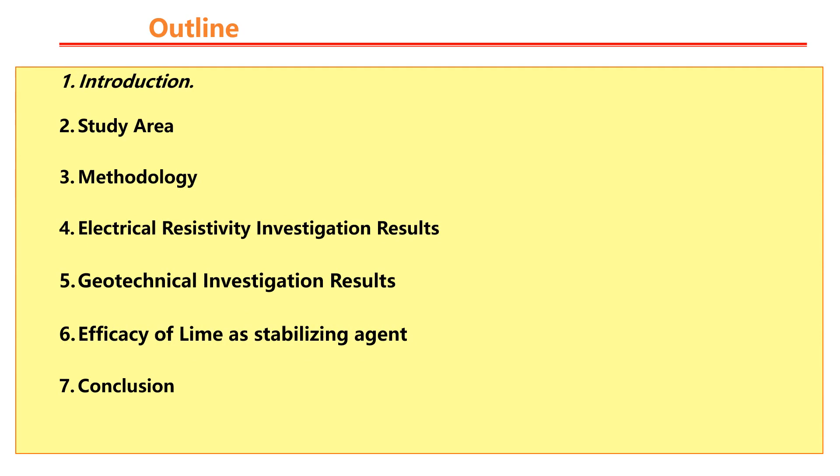Many Nigerian roads fail soon after their construction, long before their estimated lifespan, as a result of factors which include lack of proper soil investigations, bad construction materials usage, lack of proper drainage design, amongst others.

Roadway failure often arises as a result of structural defects such as depression, cracks along the road, ruts, and so on.

This always leads to high cost of transportation, unplanned maintenance costs, unnecessary delays, and sometimes leads to loss of lives and properties.

Soil stabilization has been discovered to significantly improve the strength of subgrade soil by increasing the shear strength and decreasing the swelling capacity, especially soils with high clay content.

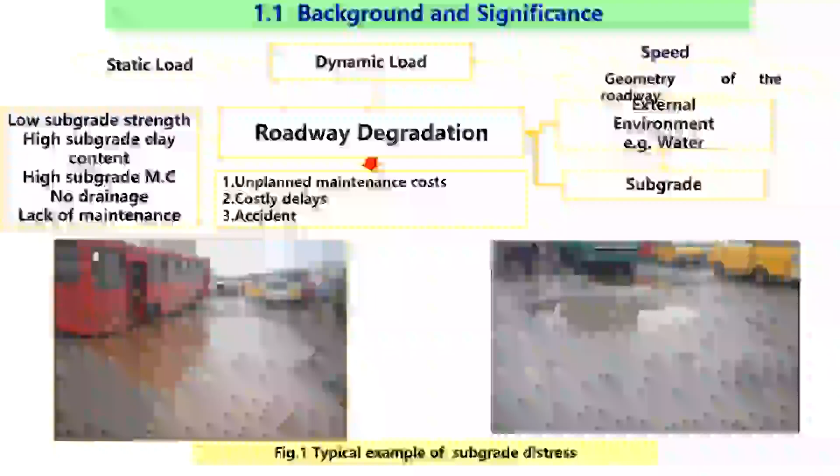In the course of this study, the cause of the road failure and the effect of lime on the strength of the subgrade soil were investigated.

Over the years, many researchers have carried out work in similar cases of road failure, and it was discovered that some of the reasons why this road failed was as a result of bad geotechnical materials of subgrade soil.

Some of the reasons why this road failed was as a result of bad geotechnical materials of subgrade soil.

Proximity to groundwater level could also be part of the reason for such road failing before their time.

Also, low resistivity values of subgrade soil was discovered, which is tantamount to the presence of clay in such subgrade soil.

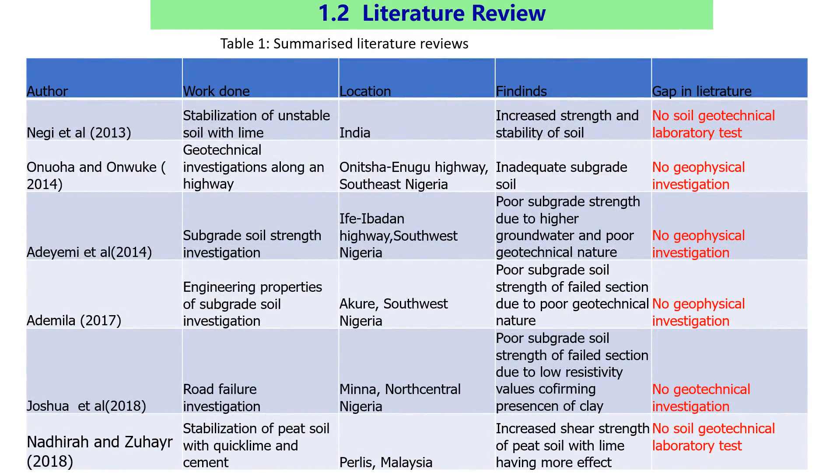So the aim of this study is to investigate the roadway subgrade failure along a section of the highway in the study area and to observe the efficacy of lime as a subgrade stabilizing agent.

The objectives are the electrical resistivity imaging of the subsurface to observe the subgrade lithology, and the determination of the geotechnical nature of the subgrade soil.

The determination of the geotechnical nature of the subgrade soil was carried out by geotechnical laboratory tests, and also observing the effects of lime as a stabilizing agent.

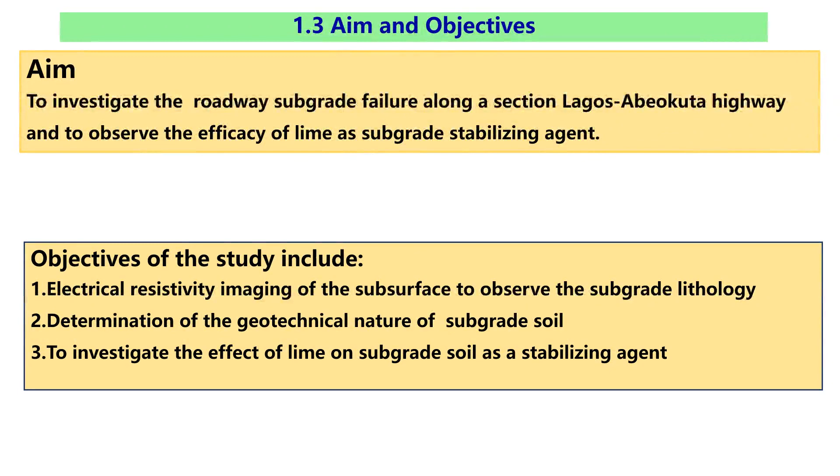This is the map of the study area showing the geological map of the area. This map was modified after Sanuade et al., 2018, and it was shown to be within coastal plain sand formation.

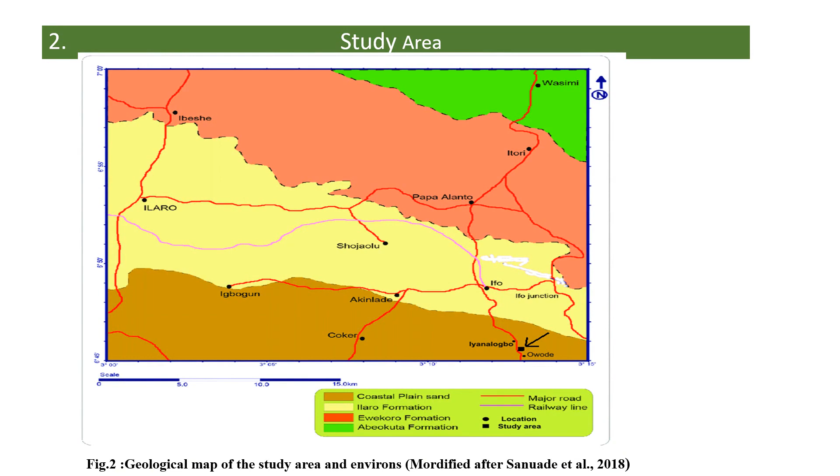This formation is within Dahomey sedimentary basins of Nigeria. This is the base map of the study area showing the direction of Abeokuta from Lagos with the arrow, and 5 traverses were delineated of 100 meters each.

Along each of these traverses, subgrade soil was taken from the depth of 1.4 meter, which were taken to the laboratory for further tests.

And along each of these traverses, electrical resistivity surveys were carried out using Wenner and Schlumberger array methods.

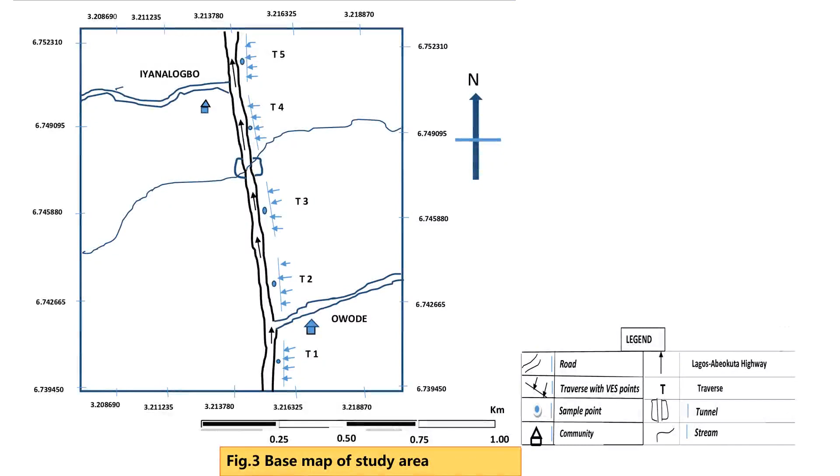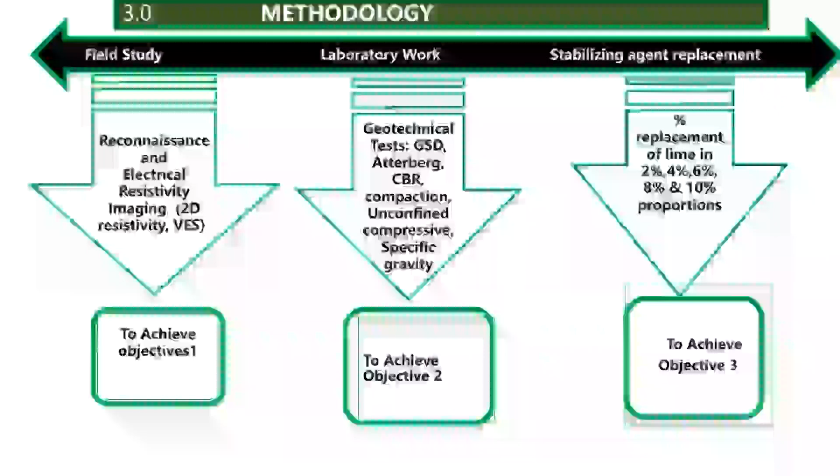In Wenner array, the spacing of the electrode that was used was 2 meters, and this small spacing was chosen so as to have a detailed information of the subsurface within the first 10 meters from the ground surface.

This small spacing was chosen so as to have detailed information of the subsurface within the first 10 meters from the ground surface.

The Schlumberger array was used to carry out vertical electrical sounding. About 4 vertical electrical soundings were carried out in each of the traverses, making a total of 20 vertical electrical soundings that were conducted. This is the laboratory geotechnical tests that were carried out.

The grain size analysis test, Atterberg limits test, compaction test, the California bearing ratio test, the compression test, and lastly, the specific gravity test.

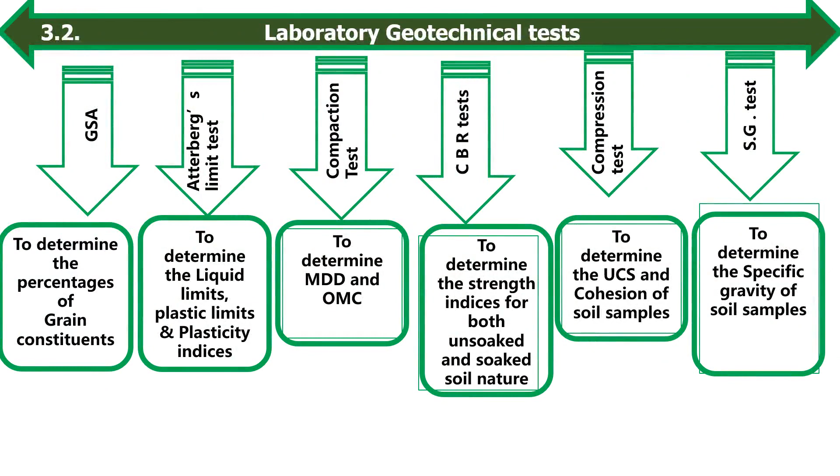This is the picture showing when I was carrying out the grain size analysis to determine the percentage of clay in the soil sample.

Clay is a problematic soil for geotechnical works, and that is why it was being used to know the percentage of clay that passes through sieve number 200.

This will also help us to know the suitability or not of the soil samples for roadway construction.

And the right is showing the sieves arranged in descending order from the coarsest at the top to the finest at the bottom. And the consistency limits, in the course of this, liquid limit and plastic limit were determined.

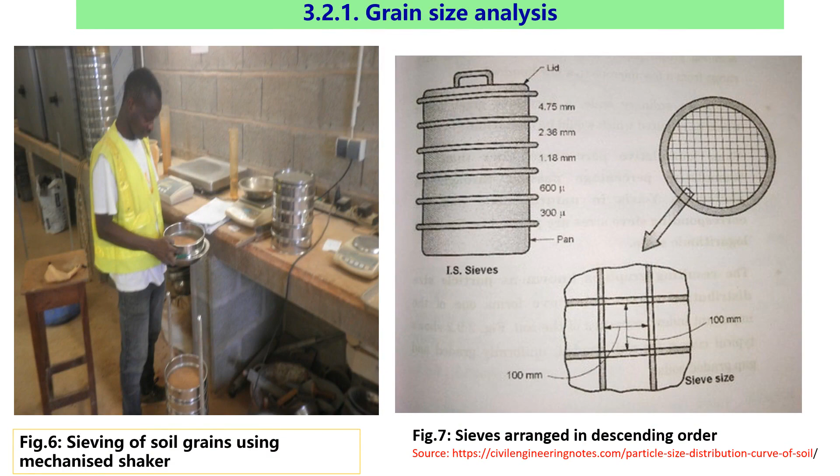And the plasticity indices were used as the numerical difference between the liquid limit and plastic limits.

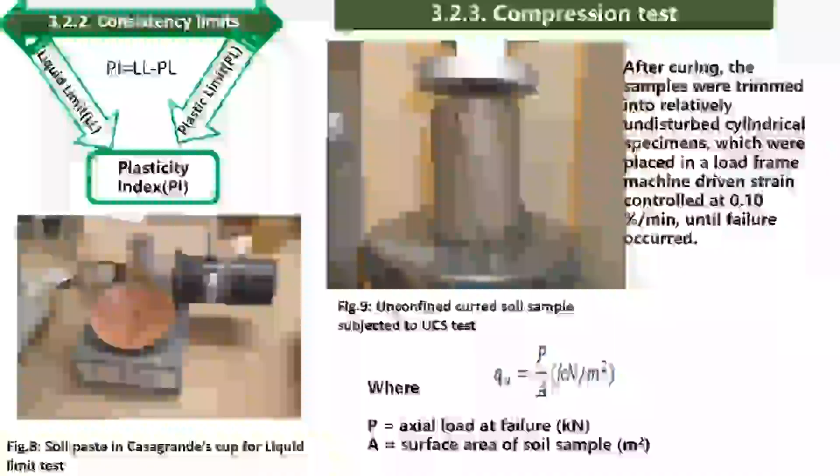Then a compression test was also carried out to know at what point the soil fails, known as the unconfined compressive strength of the soil, as being shown at the right side of the picture.

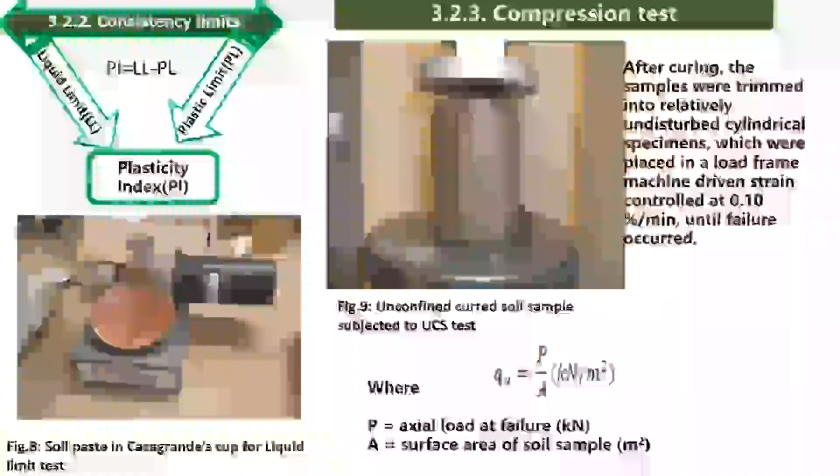The compaction test also entails determination of dry density and the corresponding moisture content of the soil samples. The graph is showing a parabolic curve with a plot of dry density against the moisture content.

So the apex of the curve shows the maximum dry density. That's the density after which the soil begins to fail.

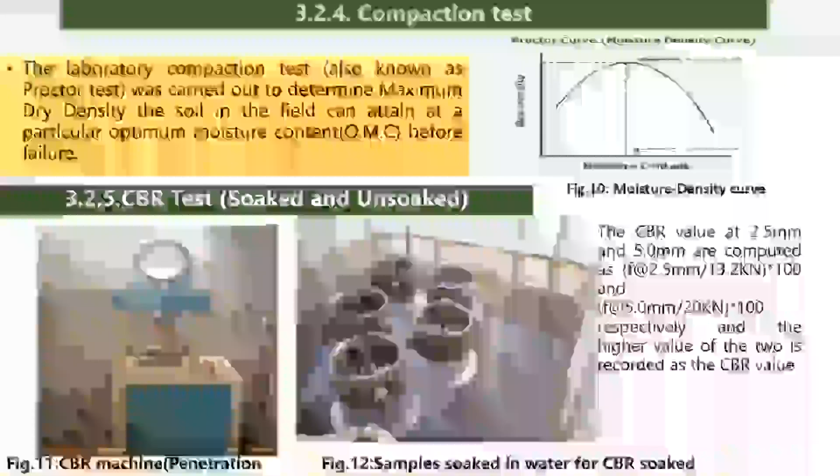California bearing ratio tests are of 2 stages: unsoaked and soaked. The soaked tests are carried out after immersion in water for about 48 hours, and the essence of this is to know the effect of water on the strength of the subgrade soil.

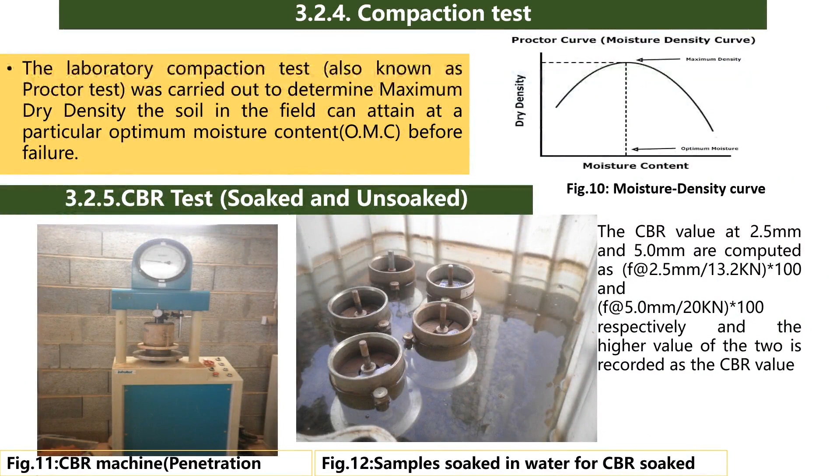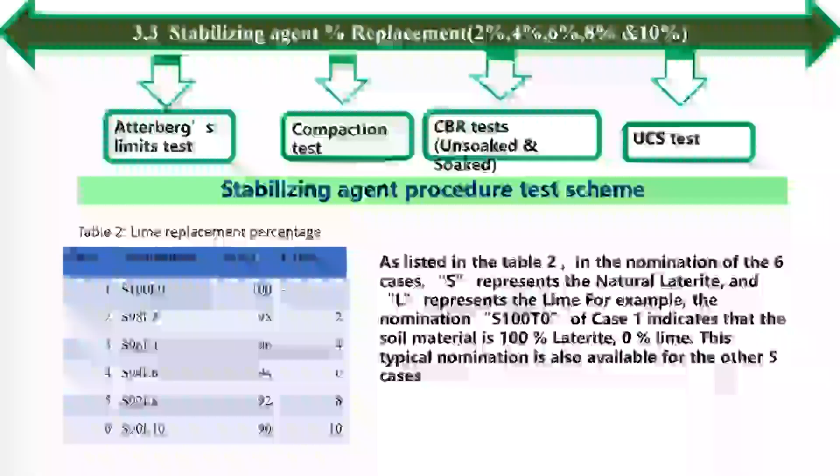The stabilizing agent entails the replacement of the soil sample with lime at 2%, 4%, 6%, 8%, and 10%. At the end of this, each of these 4 tests are carried out to know the effects of the lime on the strength of the soil using each of these 4 parameters.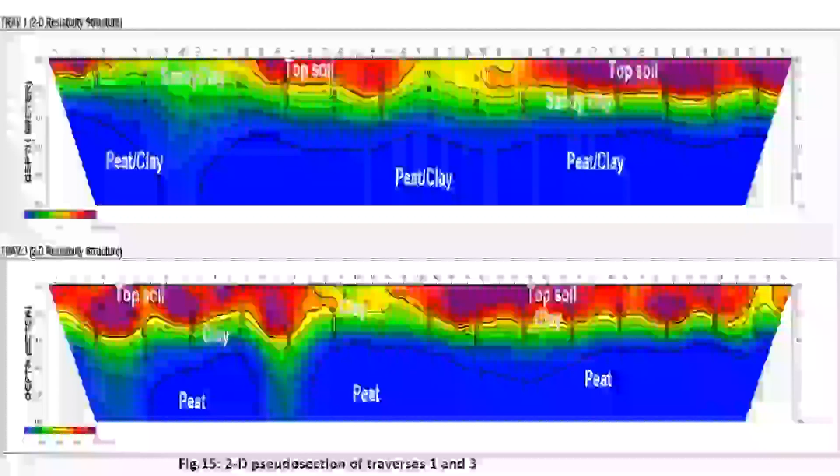From this, to the depth of 10 meters, we can see a similarity between traverses 1 and 3, with topsoil being underlain by incompetent soil - sandy clay and clay soil - then followed by peat and clay, which are not good enough for soils used for geotechnical purposes.

There is a correlation that was done between the 2D pseudosection and geo-electric section of traverse 1, as indicated. Then these are the vertical electrical sounding curves for traverse 3.

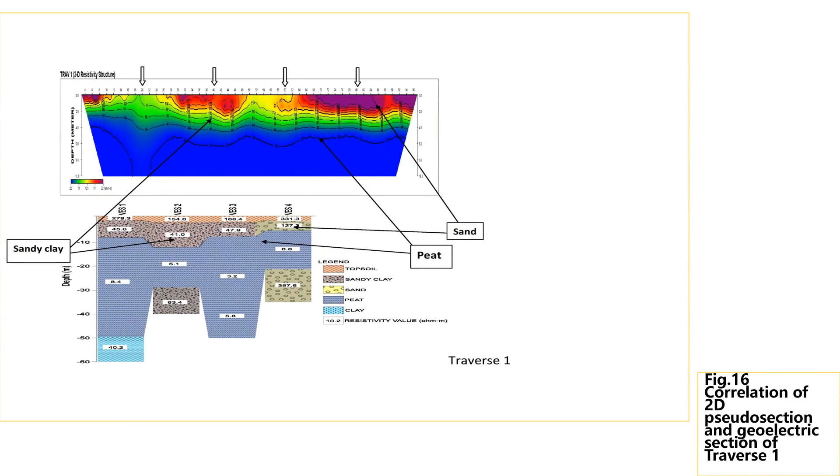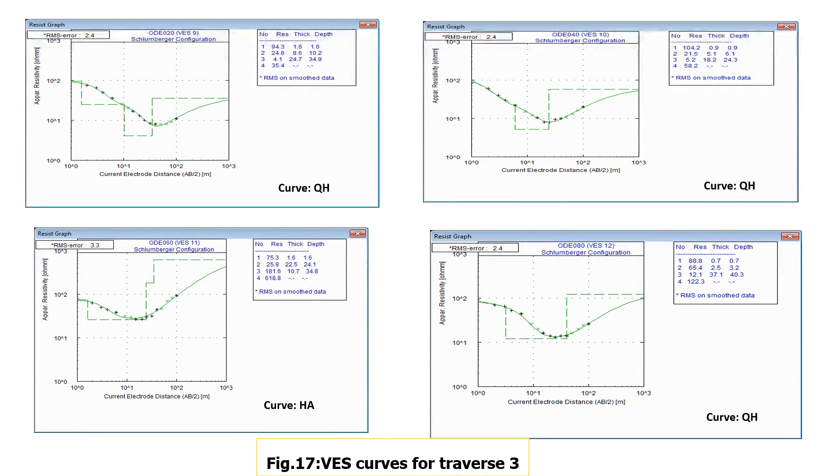Out of the 4 curve types, only one has curve type HA. As said earlier, the majority of the curve types are QH. Then there's also a correlation between the 2D section and geo-electric section of traverse 3.

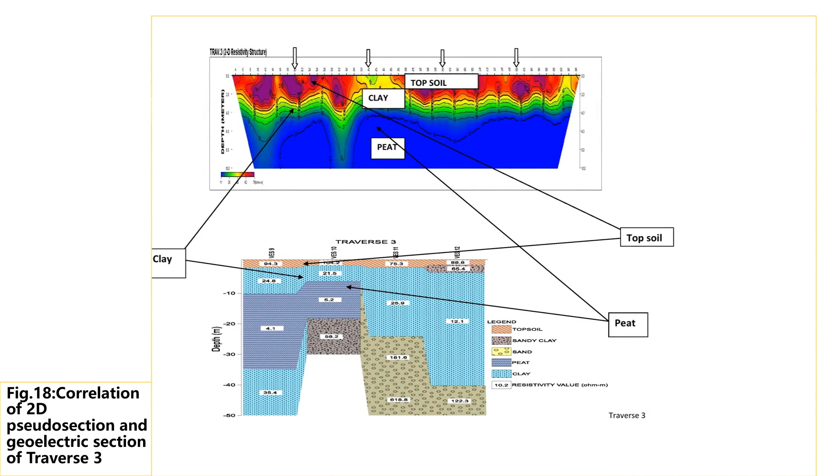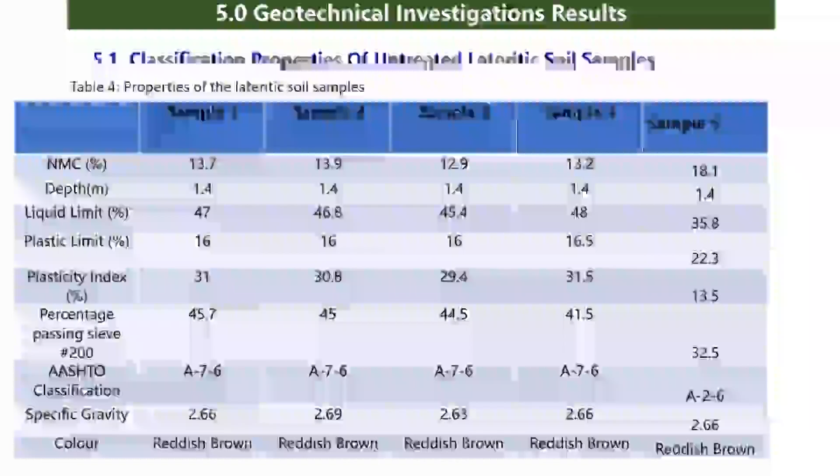This table shows the classification properties of untreated lateritic soil samples. From this table, you can see that the percentage passing through sieve 200 for sample 5 only is below 35%, which is the limit recommended by the Federal Ministry of Works and Housing for a good soil to be used as subgrade soil for road construction.

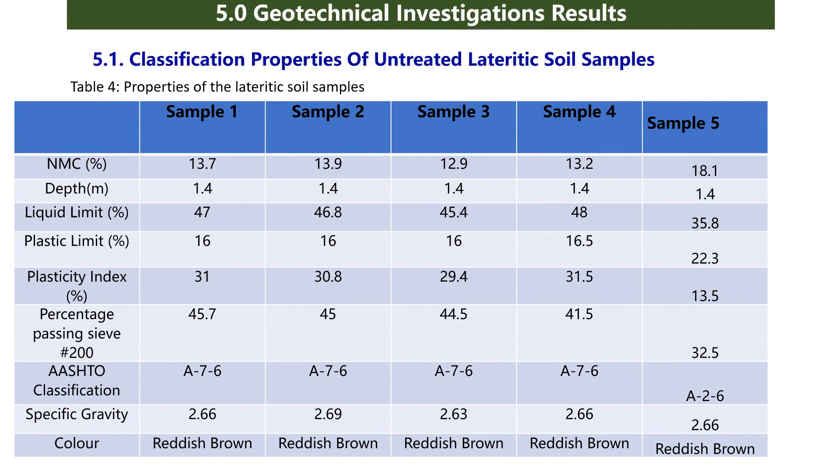Other samples, sample 1 to 4, have percentages higher than 35%. These are the curve types - the grain size distribution curves for the grain size analysis.

From the table shown, just like I said earlier, it's only sample 5 that has a percentage lower than the recommended value of 35% set by the Federal Ministry of Works and Housing. The others are above that, which suggests this could be one of the reasons why the road often fails.

Then the plasticity chart also shows all the samples fall within medium plasticity, which is an average plasticity value and is also not really good enough for subgrade soil for road construction.

Then the variation in unsoaked and soaked California bearing ratio test also shows that all values for the soaked are far lower than those for the unsoaked. The reason for this is that when water infiltrates soil, it reduces the strength of the soil.

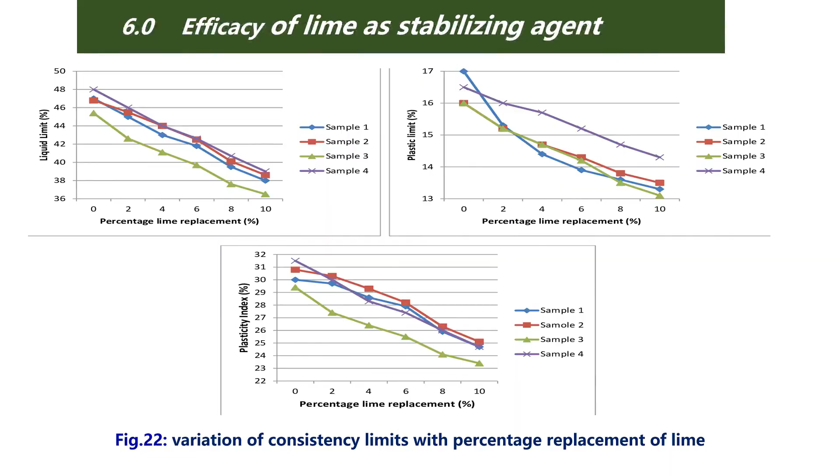Now the effect of lime as a stabilizing agent was investigated. From these curves using consistency limits - liquid limit, plastic limit, and plasticity index - there is a general trend of decreasing liquid limit with higher lime content, and for maximum dry density and optimum moisture content, there is a general decrease in maximum dry density with a corresponding increase in optimum moisture content.

And for California bearing ratio, for both soaked and unsoaked, there is a general trend of increasing California bearing ratio values with increase in lime content.

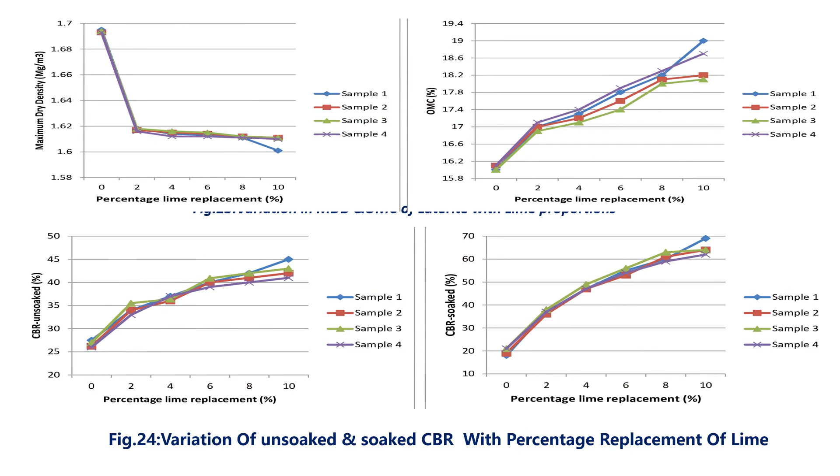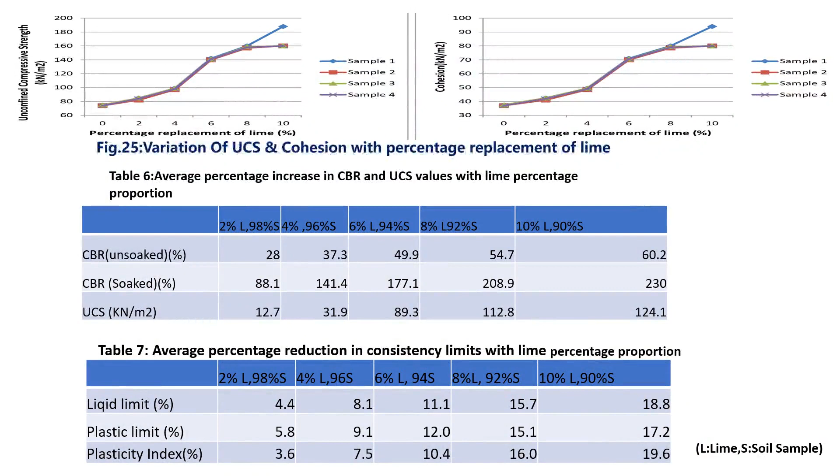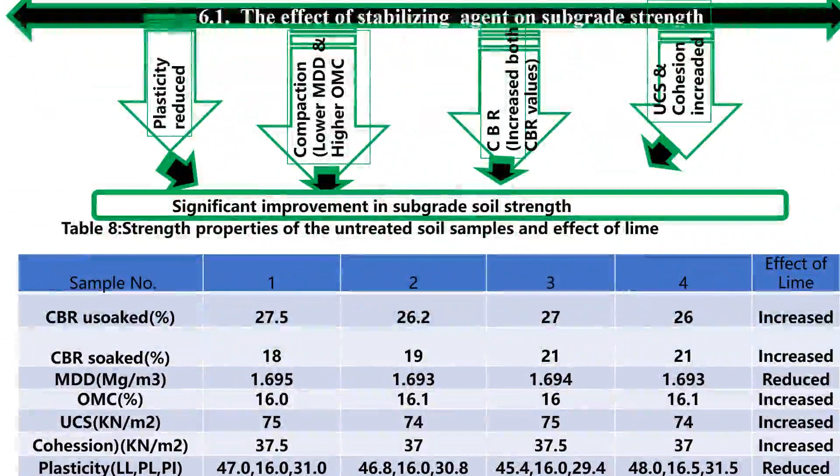So the effect of the stabilizing agent on subgrade strength was observed, and generally it led to significant improvement in subgrade soil strength. From the table, we can see that the effect of lime on the California bearing ratio test, for both soaked and unsoaked, increased.

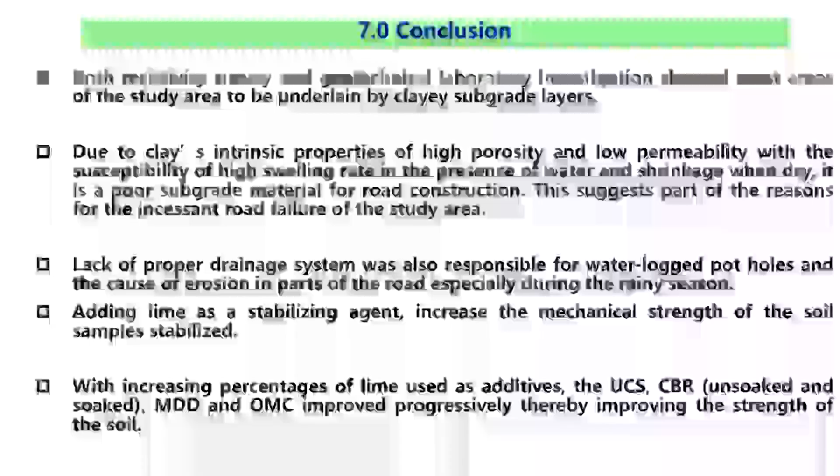Maximum dry density reduced, optimum moisture content increased, unconfined compressive strength generally increased, and cohesion also generally increased, while plasticity reduced. So in general terms, the effect of lime on the strength of the subgrade soil was found to significantly improve the strength of the soil using lime as stabilizer.